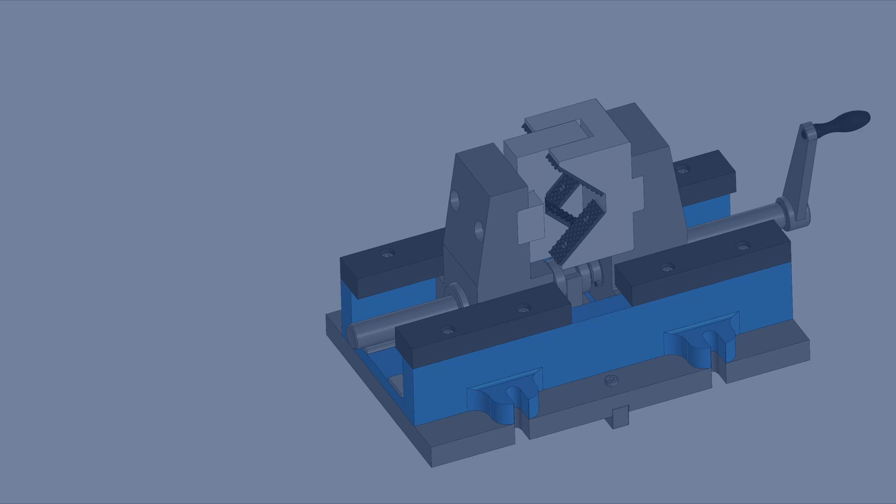In this lesson, we'll continue adding components to the vise assembly and insert the screw and the nuts. The next component to insert is the screw.

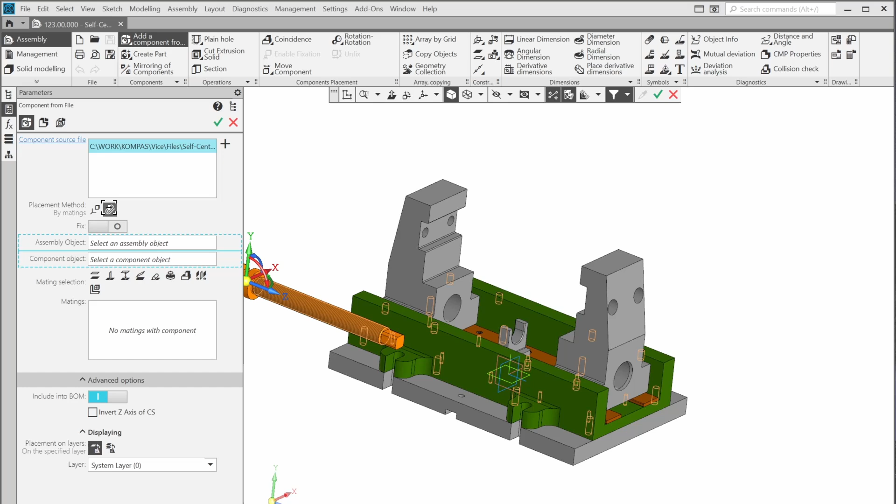Click Open. Select Mate as before, and start with a coaxial mate. Select the cylindrical face of the screw and the fork. Make sure that the square element, designed to connect to the crank handle, faces to the right.

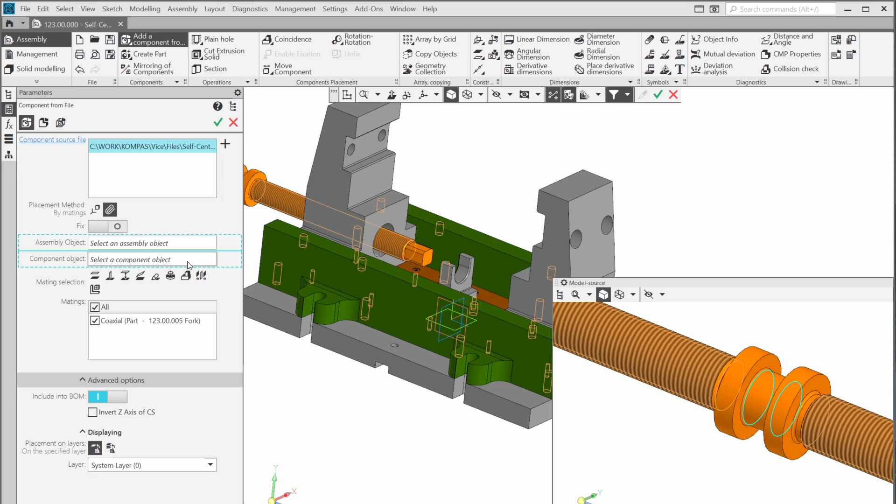If it's not, change the reverse orientation option. I don't need to change anything. Confirm. The next mating is coincidence. Select this plane face and this one. Confirm. We can add one more mating to restrict the screw's rotation about its axis, but as the screw is symmetrical, this isn't necessary here. Confirm the screw insertion. Stop the command.

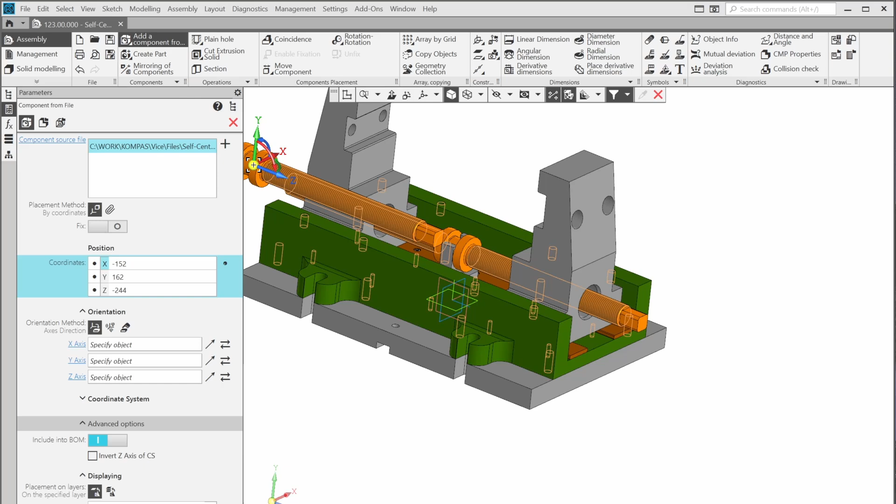Now we need to add two nuts where the screw enters the jaws. The screw might be in our way, so let's hide it. Select Add a component from a file. Select Nut and click Open.

Then repeat Mate. I'll adjust the additional window. First, let's make the nut concentric with the jaw hole.

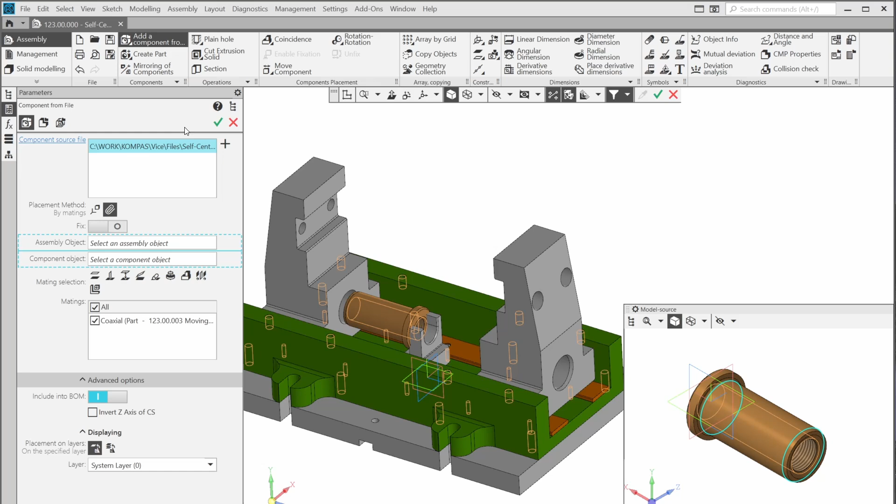I'll move the nut to see it more clearly. If you need the same, don't stop the current command and start Move Component. Move the nut to a convenient place. Stop the Move Component command.

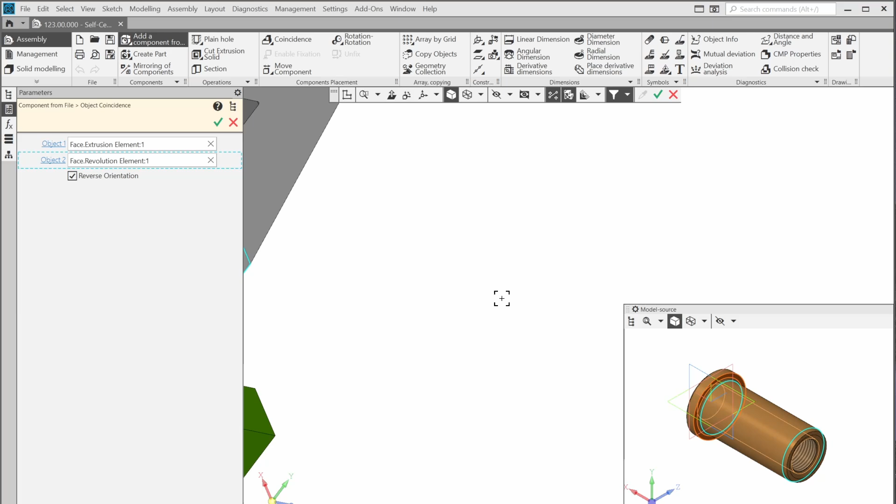Then align the plane face of the nut and the jaw. Confirm, but don't stop, because we need another nut. Click Mate. As with the first nut, make the second nut concentric to the other jaw.

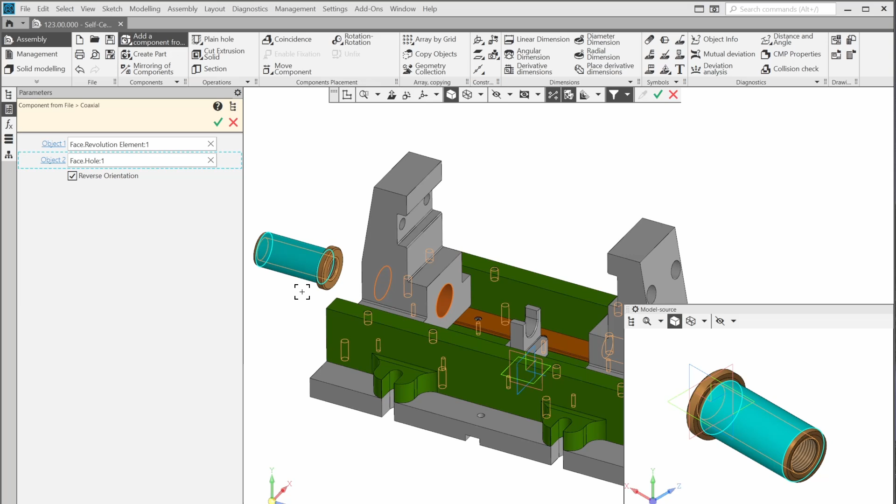This is not the correct position. It should be positioned so that the flange faces the opposite direction. Let's fix this.

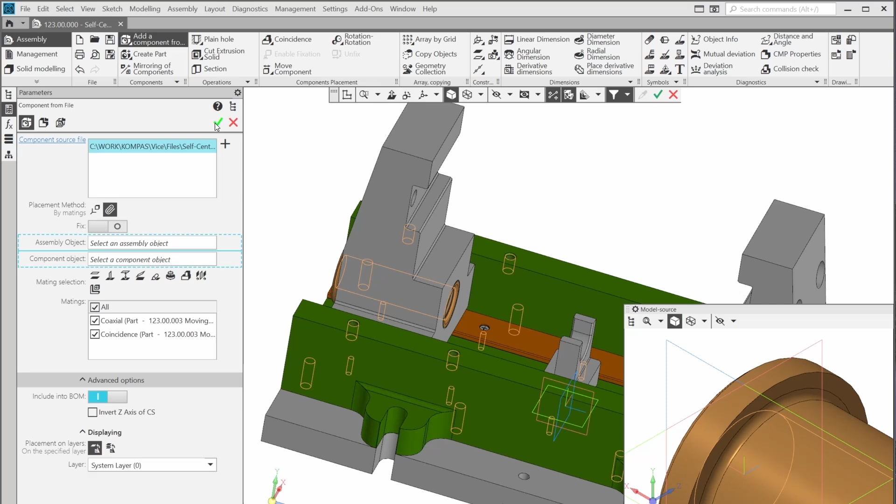Add the coincidence mating to the plane faces of the nut and the jaw. Confirm. Confirm and stop the command. Now we can unhide the screw in the graphic area.